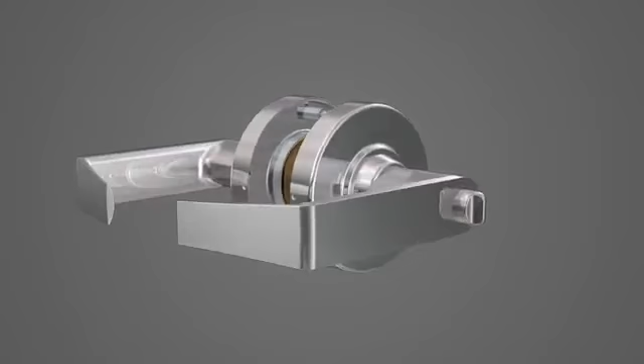It's no wonder the ND series has been one of Schlage's best-selling mechanical locks. The ND series is tough, dependable, and versatile enough to fit the needs of a wide variety of applications. Whether it's a classroom door, in a hospital, or an executive office, your customers can count on the ND series to deliver the heavy-duty performance they need and security they can depend on.

The installation is done the way the factory needs it to be, or the criteria meets the specifications. We have very little service or repairs. They're a very reliable lock set, and it all boils back to the installation.

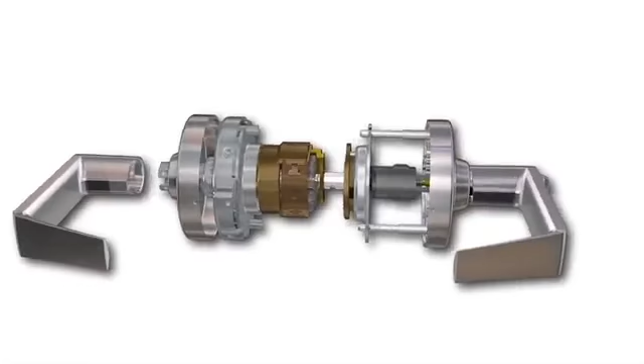When we set out to enhance the ND series, our goal was to improve the performance of the lock by making installation easier and more accurate. We added a snap-in anti-rotation plate that holds the lock securely on the door. That means you can reach for your tools without trying to hold the lock in place on the door at the same time.

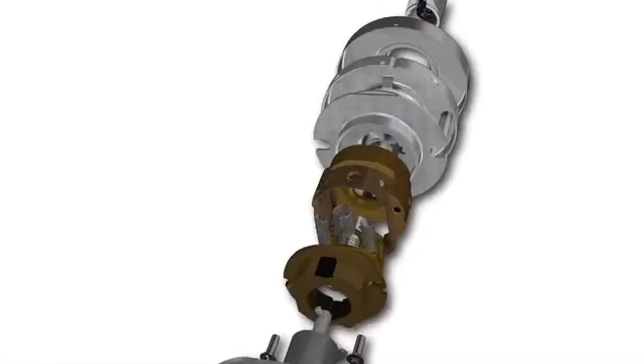In 2009, we redesigned the bridge slide in order to improve the lock's overall durability. The bridge slide prevents components from binding and provides greater spring retention. We've also built in a visual chassis-to-latch alignment gauge.

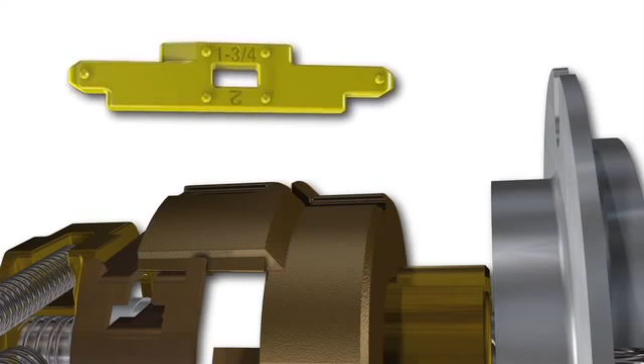The field-adjustable gauge provides both a visual and positive stop and takes the guesswork out of adjusting the chassis for different door thicknesses. The spacer comes preset to the most common industry standard door thickness of 1 3/4 inch. The gauge prevents installers from over-tightening the door thickness adjustment, which can cause internal components to bind and potentially fail.

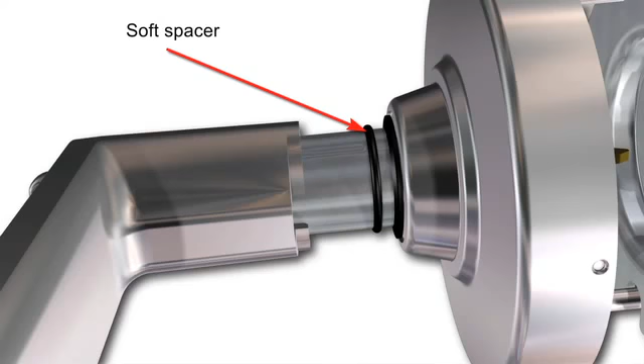In 2009, we also improved the locking lug and key cam. The locking lug and key cam are stronger and more resistant to damage than the previous design. At the lever, we've added a soft spacer that makes the lever feel more secure out of the box. By adding this spacer, we have noticeably increased the lever-to-spindle engagement, which helps prevent lever sag over the life of the lock. This also gives the customer the assurance they have chosen a lock built to last.

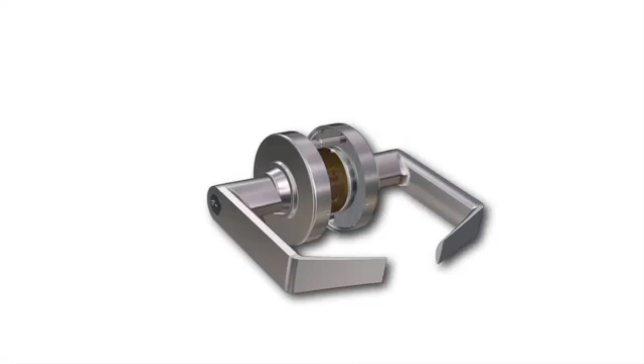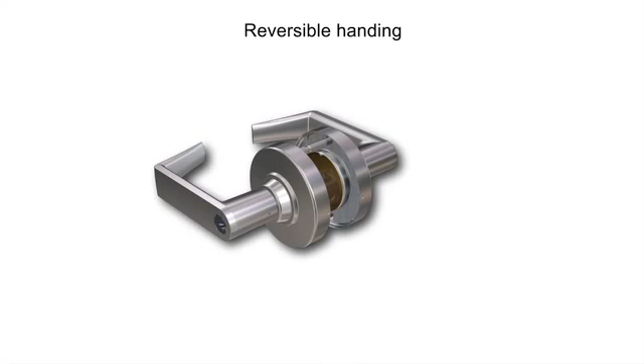And as always, the ND series offers features like our exclusive VandalGuard technology that protects the lever against damage from excessive force or vandalism. The ND series lock is also quite versatile. For example, the ND offers reversible handing that can be done in the field, and the ND can be transformed into several functions with the change of only a few components. It's important to note that changing the function of an ND series lock can only be done for non-fire rated openings.

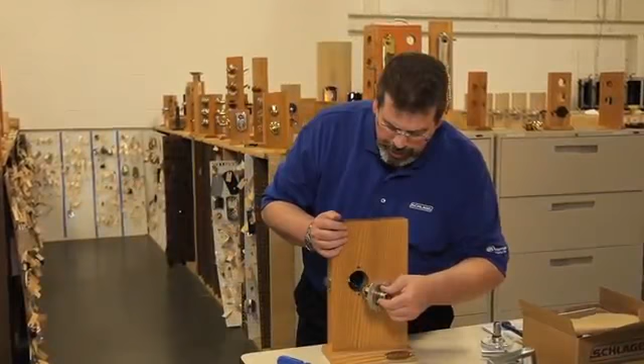To make the installation and service of the ND series even easier, we've developed a lever removal tool that is sold separately and can be used with the Schlage ND series, L series, and several of our other lock lines. Schlage provides factory training and field support to help you fine-tune your installation skills. Schlage is also committed to providing a comprehensive selection of serviceable parts available for order, so you don't have to purchase a new lock when you only require replacement parts.

The result is an ND series lock that delivers the versatility, durability, and reliability you expect from Schlage, and is easier to install correctly the first time. After all, great performance begins with an accurate installation. We are confident that the improvements that we're making to the Schlage ND lock will improve the performance of the product, and we're backing that up with an additional 3 years to the warranties.

Excellent improvements. They listen to what people have been telling them since they've launched the new ND. Every one of them will make it easier, a better product in the end, and easier to install. We really like that it's just a 2-screw system, that you put it in, you put 2 screws in, it's tight, it's done. The improvements Schlage has made, making the stop on the plate for door thickness adjustment is huge, because that's often one of the biggest problems that then lead to internal failures.

One thing I like a lot about the Schlage is the versatility of the ND. We can go and take it from a classroom to a storeroom to an office function. We can do it within minutes, and it really is able to give us the flexibility that we need. Everything about it is maintenance friendly, and Schlage supports that. It's a great product. It's got a great past, and I'm sure it's going to be a great future for it.

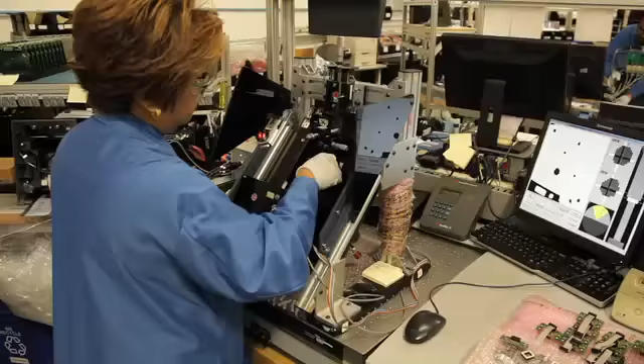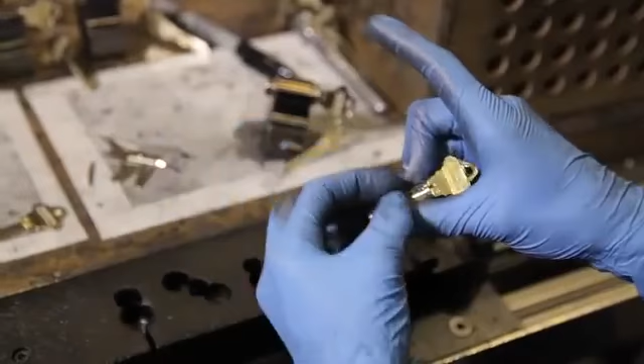At Schlage, we're committed to constant product innovation and improvement, and we stand behind our products with world-class service and support. That's why the Schlage ND series will now be backed by a 10-year warranty. We are confident that these installation enhancements will help ensure that lock installation will be right the first time. Our goal is to give you and your customers security solutions you can rely on for excellent value, exceptional quality, and unparalleled performance. That's why our locks have been the most trusted locks in the business for decades. With the Schlage ND series, you can be sure you're making the right choice the first time, every time.

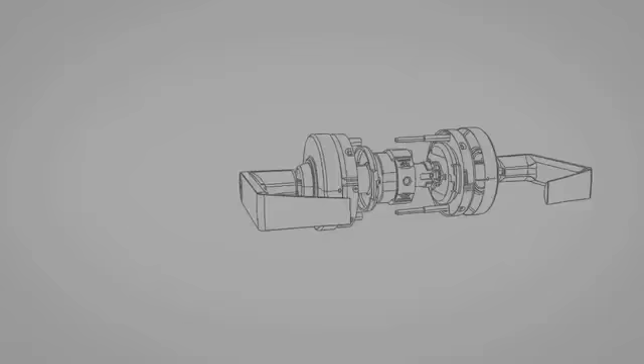Schlage has stepped up the game. They have made improvements to their product with no additional cost. They're extending the warranty. They're always there. You know, they're a phone call away. And Schlage excels every time. Performance, availability, price, training, warranty, it's our #1 lock choice.